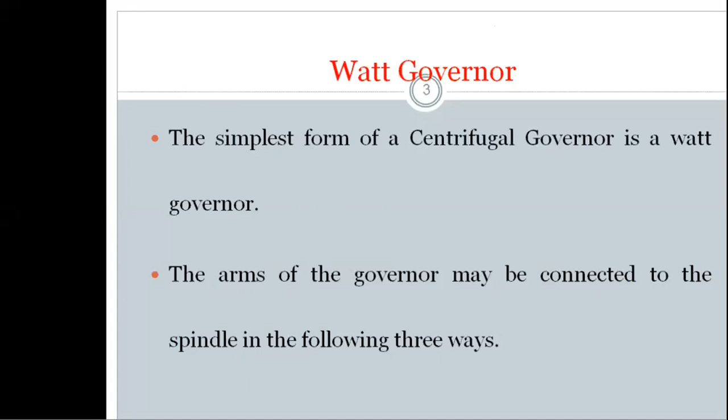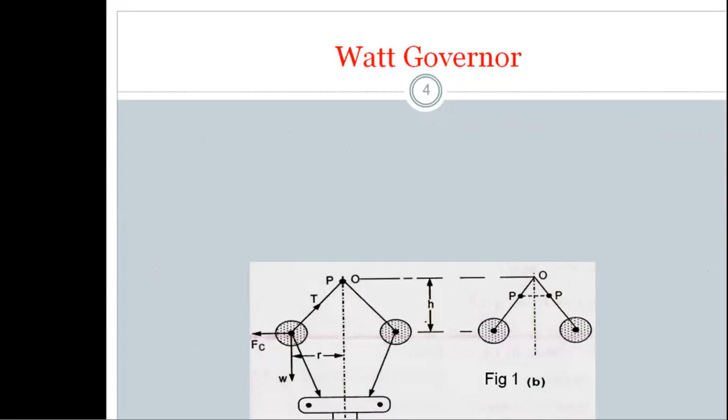Once again I will recall the construction of this Watt governor. Here is the sleeve which slides along the spindle. This is the spindle axis, and these are the links - one link and another link. These are the two arms, and in this figure the two arms are pivoted on the axis of the spindle. So this is one, and next the pivot may be on the spindle axis as shown in figure A.

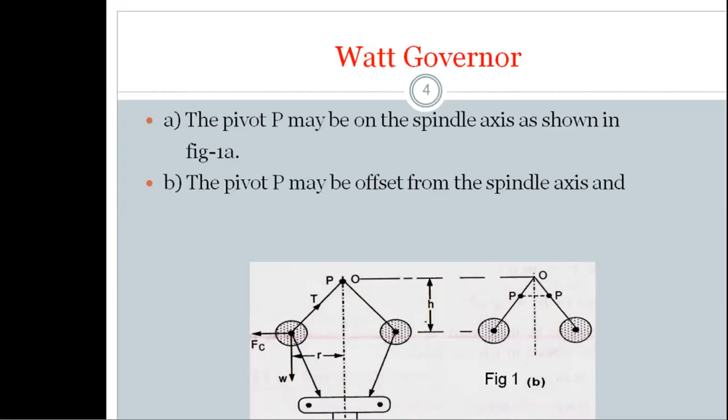Sometimes the pivot may be offset from the spindle axis. This is the spindle axis and the pivot is away from it, here and here, away from the spindle axis. And the arms when produced intersect at O as shown in the figure. So if you see, this is the arm, this is the pivot, and this is the arm. If you produce them onto the axis, they will intersect at one point, that is O.

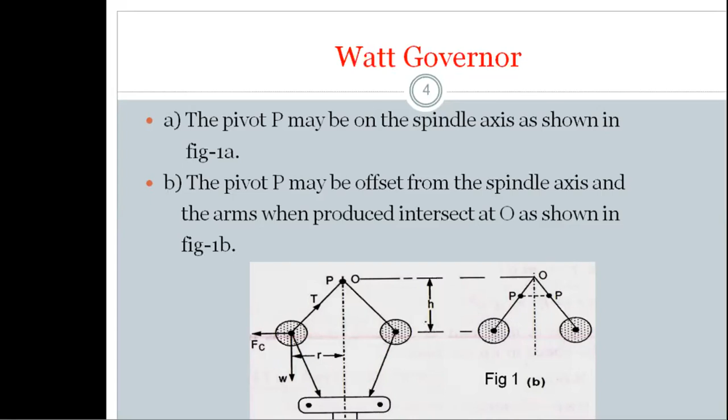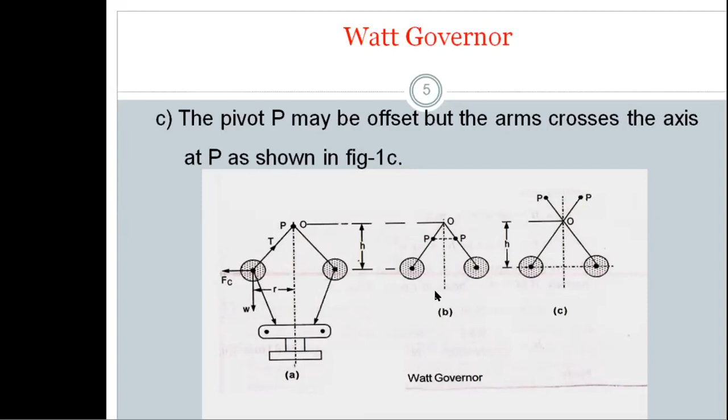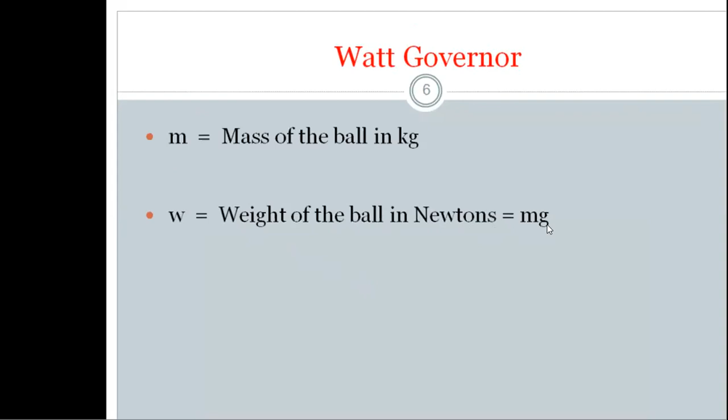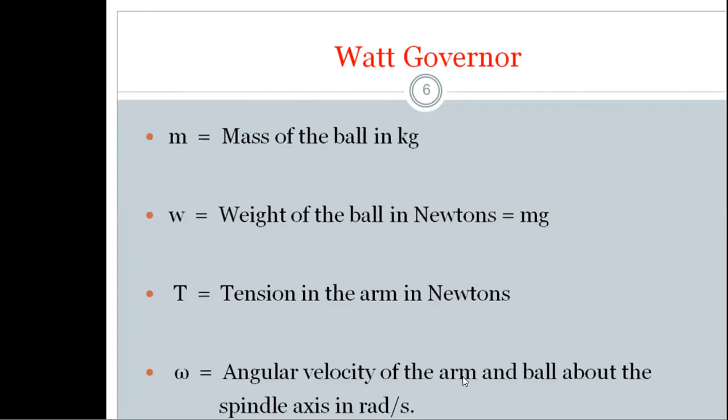For the Watt governor, let m be the mass of the ball in kgs, and W the weight of the ball in newtons, that is mg, where m is the mass of the ball in kgs and g is the acceleration due to gravity. T is the tension in the arm in newtons, and omega is the angular velocity of the arm and ball about the spindle axis in radians per second.

R will be the radius of rotation of the ball, and Fc is the centrifugal force acting on the ball in newtons, equal to m omega square r. As per Newton's second law, force equals mass into acceleration. Similarly, centrifugal force acting on the balls equals mass into angular acceleration, that is m omega square r, where m is the mass of the ball, omega is the angular velocity, and r is the radius of rotation of the balls.

In this figure you can see various points: from this point to the pivot is the vertical height of the arm, whereas the length of the arm is different - so this is the height of the governor. This is the pivot, this is the tension in the arm, here is the radius of rotation of the ball, W is the weight of the ball, and Fc is the centrifugal force acting away from the axis of the spindle. Corresponding to this, there should also be some controlling force.

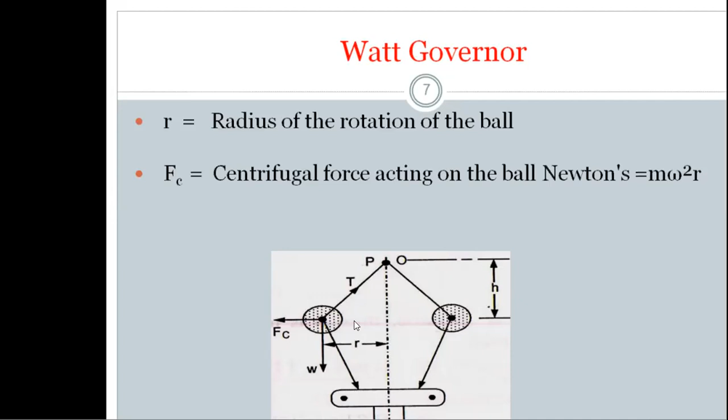So h will be the height of the governor in meters. The terms: m is the mass of the ball in kgs, omega is the angular velocity in radians per second of the spindle along with the balls and arms, r is the radius of rotation, Fc is the centrifugal force acting on the ball in newtons, and T is the tension in the arm.

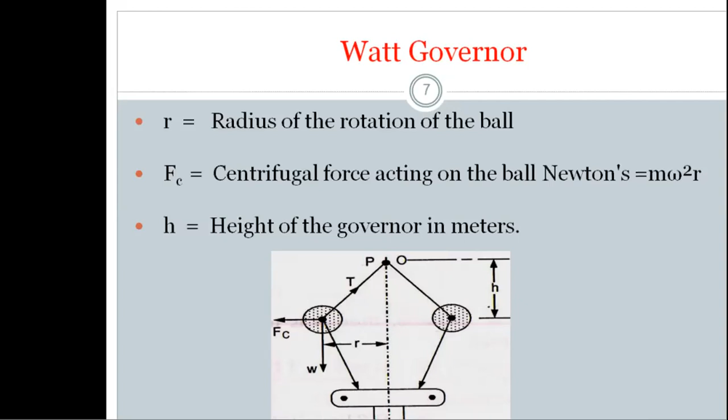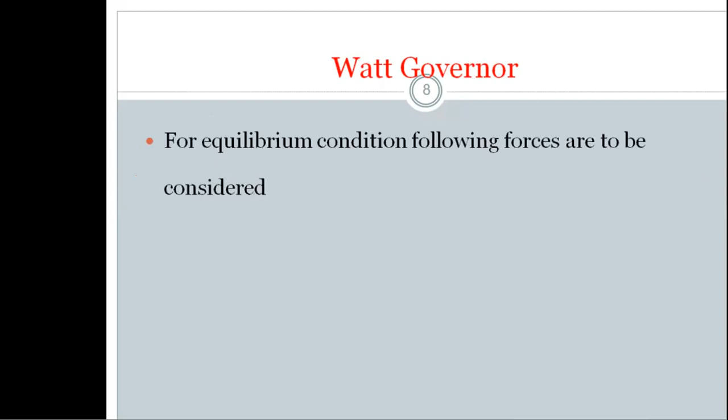So this is all about it. Now for equilibrium condition, the following forces are to be considered.

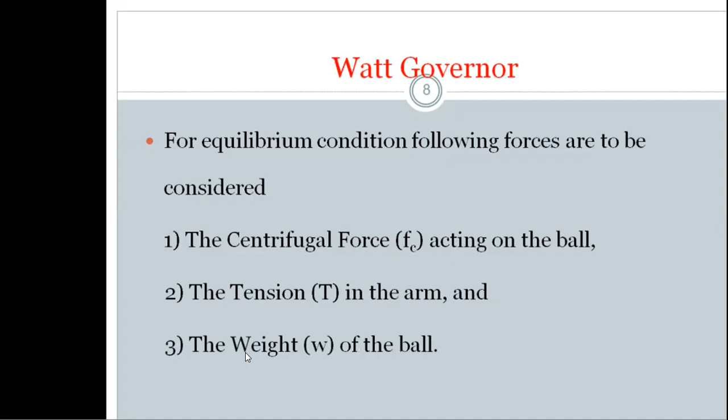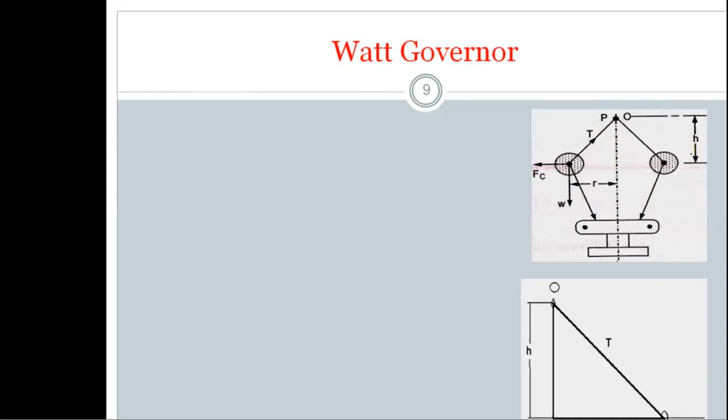Number one is the centrifugal force Fc acting on the ball, away from the axis of the spindle. The tension T is the tension in the arm itself. Next is the weight of the ball acting towards the earth or to the ground. So here you can see the tension in the arm, the centrifugal force, and the weight. Due to these three forces—centrifugal force, tension, and weight of the ball—the spinning ball is kept in equilibrium condition.

Now let us take moments about point O. If we take Fc into height, this gives the clockwise moment, whereas W into radius of rotation gives the anti-clockwise moment.

As per the equilibrium condition, the sum of the clockwise moments must equal the sum of the anti-clockwise moments. The centrifugal force has a clockwise moment, while the weight of the ball has an anti-clockwise moment. The line of action of the tension T passes through O, so the moment for tension is zero.

So only the sum of clockwise moments and anti-clockwise moments matter, both being equal to keep the ball in equilibrium, with no moment contribution from the tension in the arm. W is equal to mg, as we already know.

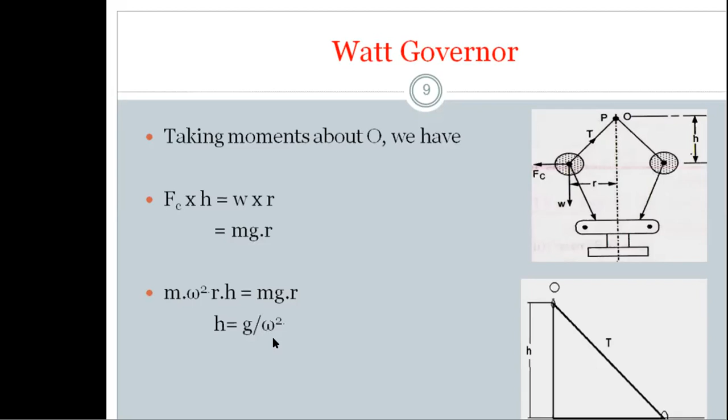Here you can see the tension and R, the radius of rotation. So the height of the governor is given by acceleration due to gravity divided by the angular velocity of the ball squared, where g equals 9.81 meters per second square.

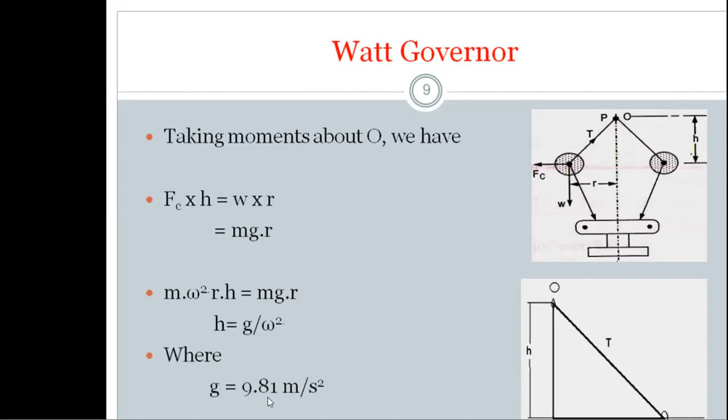So the height of the governor is inversely proportional to the square of the speed. We conclude that in a Watt governor, the height of the governor is inversely proportional to the square of the speed. The speed of the governor is independent of the mass of the ball—the speed does not depend on the mass, but depends on the height of the governor.

If the speed of the governor increases, the height will decrease. If the speed of the governor decreases, the height will increase. So this is the idea—this is all about the analysis of the Watt governor.

Let us see one simple problem on Watt governor. Calculate the height of the Watt governor when it rotates at 60 rpm, that is 60 revolutions per minute. Also find the change in vertical height when its speed increases to 61 revolutions per minute.

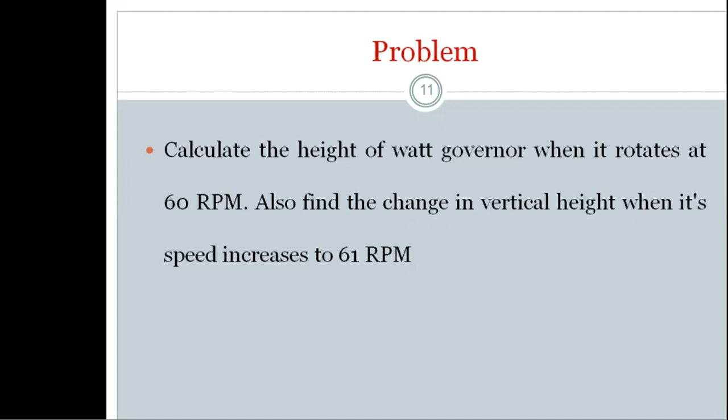As we have the formula, one speed is given in revolutions per minute and another speed is also given in revolutions per minute. By using the angular velocity formula omega equals 2 pi n by 60, we will get our solution. Let us see the solution.

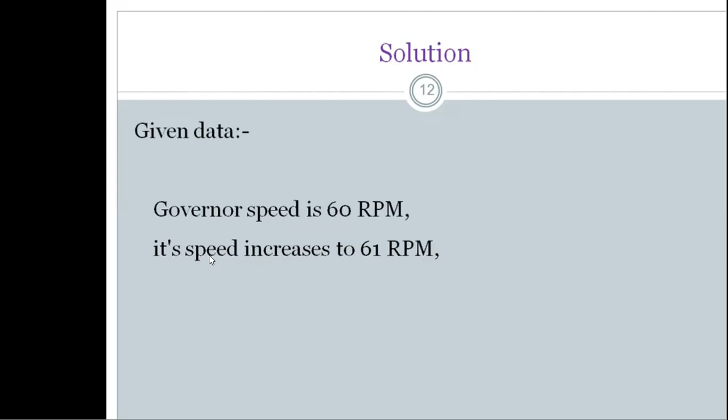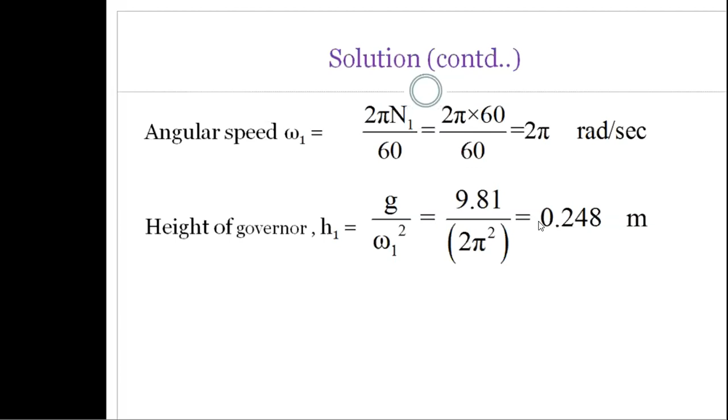Governor speed is 60 revolutions per minute; if its speed increases to 61 revolutions per minute, we need to calculate the change in vertical height. So angular speed omega1 equals 2 pi n1 by 60, which gives 2 pi radians per second. For this speed, the height of the governor h1 equals g by omega1 square, that is 9.81 by (2 pi) square, giving height of the governor as 0.248 meters. This is the first answer.

Similarly, when speed increases to 61 revolutions per minute, n2, the angular speed equals 2 pi n2 by 60, which gives 2.04 pi radians per second. The height of the governor h2 equals g by omega2 square, that is 9.81 divided by (2.04 pi) square, giving 0.24 meters only.

Thereby the change in vertical height of the governor is equal to h1 minus h2. As we are aware, when the speed is less, the height of the governor is more. When the speed is more, the height of the governor is less. Thereby, at 60 speed, the height is more, whereas at 61 revolutions per minute, the height will be less. Thereby, there is a change in the vertical height of Watt governor, that is h1 minus h2 is equal to 0.008 meters, that is 8 mm difference is there.

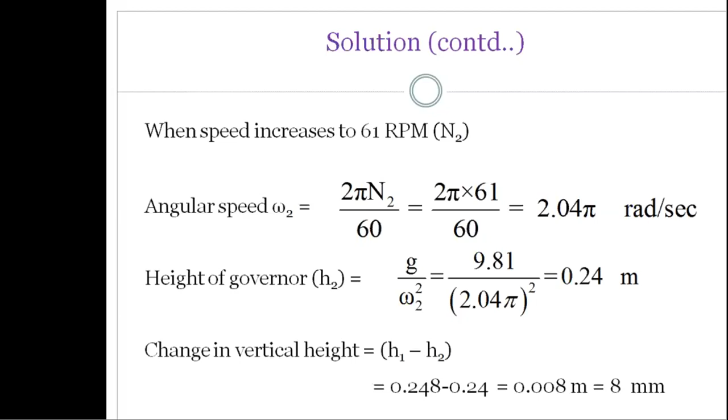With this, we can conclude one thing. Whenever the speed is less, the height of the governor is more. Whenever the speed is more, the height of the governor is less. That means the height of the governor is inversely proportional to the speed of the governor. This is the conclusion for this Watt governor. Let us see once again.

So next, Porter governor. Here you can see the Porter governor. This is also a centrifugal governor. When comparing this previous Watt governor and this Porter governor, the only difference is here there is a dead weight on the spindle. That means over the sleeve there is a dead weight which will bring the governor to the normal position, that means to the rated speed, right?

So here you can see this is the sleeve and this is the spindle, and this is the dead weight. Weight of the dead weight is equal to W. And now in this case, these are the two links, and these two are the arms, which are pivoted at point B, and here is the height of the governor, and R is equal to radius of rotation, and W will be the weight of the ball, whereas Fc is equal to m omega square, that is centrifugal force.

These are the balls. So whereas in the previous case, now the only difference is here in this case is the dead weight. This dead weight will be split at this position and this split position. That means here it is W by 2, here it is W by 2. So that is the only difference. And the same as in the previous Watt governor, spindle is there, arms are there, and links are there, balls are there, and they were pivoted at this position, but only this dead weight is extra in this Porter governor.

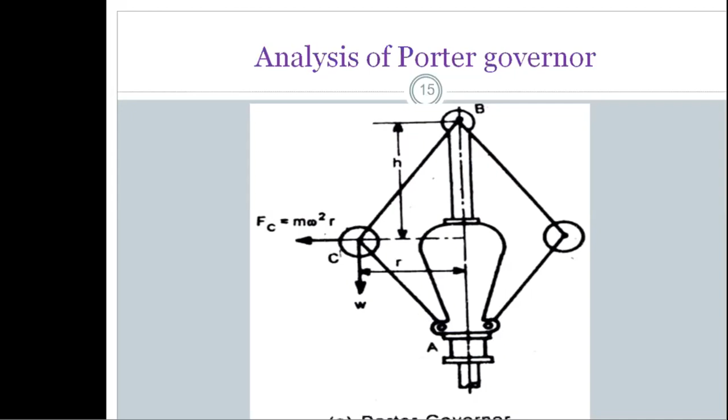Right? So now let us see the analysis of Porter governor. Here are the forces acting on different parts. Here T1 is the tension in the arm, and T2 will be the tension in the link. Whereas in the previous case, there is no tension in the link, but here in this case there is a tension in the link also. And here Fc will be the centrifugal force on the ball, and small w will be the weight of the ball, which is equal to mg, small mg.

And now here it is dead weight W by 2. It is just like a simply supported beam. We can split this W by 2 here on this side and W by 2 on the other side. So capital W is equal to weight of the dead weight, that means mass of the dead weight into acceleration due to gravity. Capital W is equal to capital M into g. And only half of this will be shared.

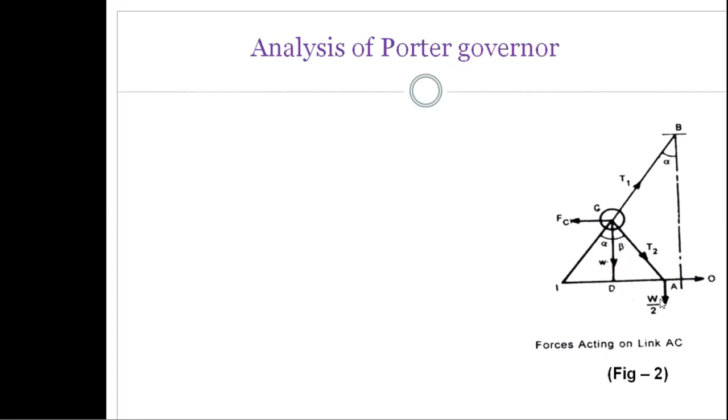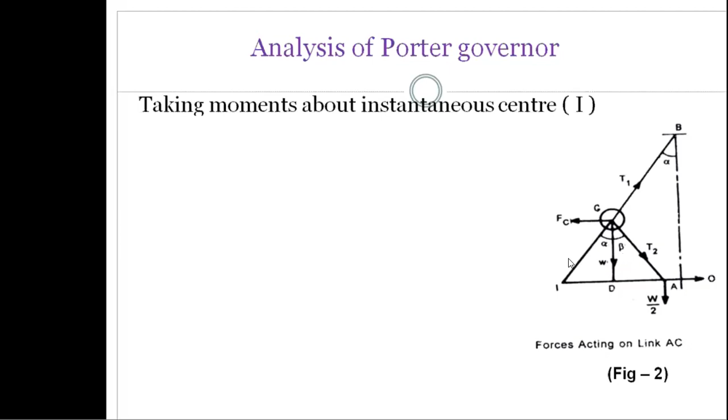So in this analysis, let us take moments about the instantaneous center. Let us extend this one and also extend this one. This will give you the instantaneous center, and we have to take moments about this instantaneous center. If you take moments about this instantaneous center I, the moment for T1 will be 0, whereas there is a moment for T2, and there is a moment for W, and there is a moment for centrifugal force, and also there is a moment for capital W by 2. So let us see. And this is the angle of arm with respect to spindle axis, this will be the angle beta with respect to spindle.

So now after taking this, as we are aware, in order to keep the ball in equilibrium condition, the sum of the clockwise moments must be equal to the sum of the anti-clockwise moments. So thereby in this case, about this point, if you take moments about this point, this will give you anti-clockwise moment, that means centrifugal force will give you anti-clockwise moments, number one. Whereas the weight of the ball will give you clockwise moment, and half of the weight of the dead weight will give you also clockwise moment, whereas T2 will also give you clockwise moment, right?

So that means if you take a triangle forming, this will be the alpha, this will be the beta, so the sum of the clockwise moments must be equal to the sum of the anti-clockwise moments.

FC into the distance CD, that is this distance CD, is equal to this, and this will give you clockwise moment, and this is also going to give you clockwise moments. We are going to neglect this small value, that means tension in the link will be very small.

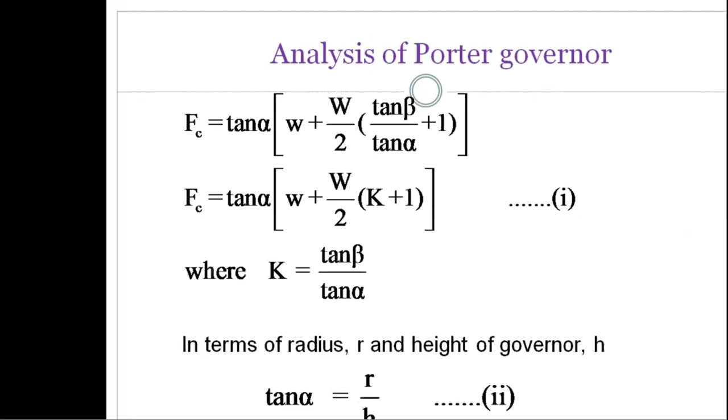If you take K is equal to tan beta by tan alpha, as we are also aware that R is equal to, if you see, so this will be the R, this will be the R, whereas from here to here is the H, so tan alpha is equal to R by h. This is one equation and this is the second equation.

And also centrifugal force Fc is equal to m omega square r. Already we are aware of this formula, so this is the third equation.

From equations 1, 2 and 3, after substitution of the Fc value and the tan alpha value, you will get: m omega square r into small w plus capital W by 2 into k plus 1 into r by h. And now here r gets cancelled, right?

So for further simplification of the equation, we conclude omega square is equal to, r gets cancelled as you have seen, r gets cancelled, and m, if you bring toward this side, or if you substitute m value as w by g,

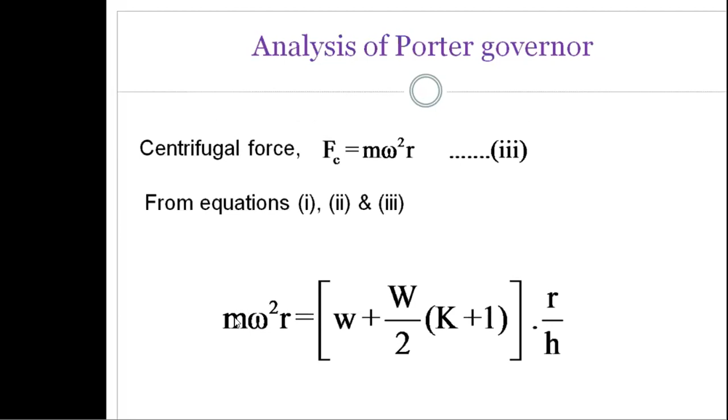then you will get omega square is equal to capital W plus small w plus w by 2, capital W by 2 into k plus 1, by m, into 1 by h, where omega is equal to angular speed of the governor in radians per second, small w is the weight of the ball of the governor in newtons, capital W is weight of the governor sleeve, and m is the mass of the governor balls in kgs.

From the analysis we can see, replacing small w with small mg and capital W with capital Mg, the equation for angular speed becomes omega square is equal to m plus capital M by 2 into k plus 1 by m, g by h.

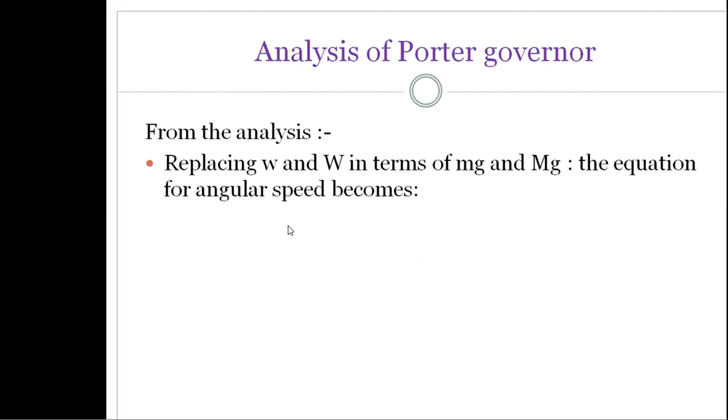So this is the formula in terms of masses, whereas the previous case is in terms of weights, and mass of the ball and speed, whereas this will be in terms of masses.

So when the length of the arms and the suspension are same, then they are at equal distances, r is equal to h, then k is equal to 1. So the formula will become, for r is equal to h and k is equal to 1, then finally omega square is equal to m plus capital M by small m into g by h. That is the final formula that you will get.

So when the lengths of the arms and suspension are same and are at equal distances, in such cases r is equal to h and k is equal to 1. That means if the suspension and length of arms are same, this will happen for offset pivot. That means if the balls are connected to the spindle through arms by means of offset pivot, in such cases this will take place, right?

So this is all about the formulas that we are already having. This is the analysis of the Porter governor. As we are already aware, the working of Porter governor is similar to the working of centrifugal governor, and only the difference is the dead weight over the sleeve. That is the only difference.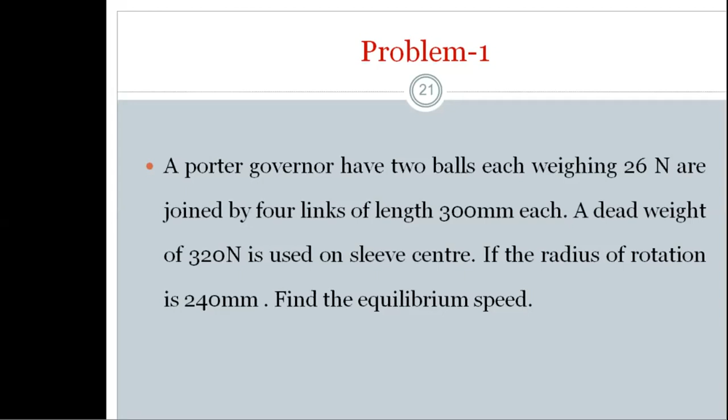So here one thing is, the links are of the same length, number one. Number two is the dead weights are at sleeve center only. So that's why...

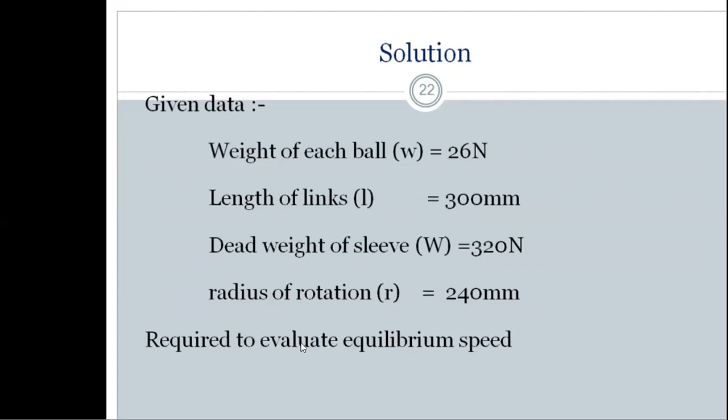Weight of the ball small w is equal to 26 newtons and the length of the links is equal to 300 mm, and dead weight of sleeve capital W is equal to 320 newtons and radius of rotation is 240 mm given, and we are required to evaluate the equilibrium speed. Height of the governor H is equal to L square. That means simply you can see the governor, L square minus R square, length of the link square minus R square, that will give you the height of the governor H, right?

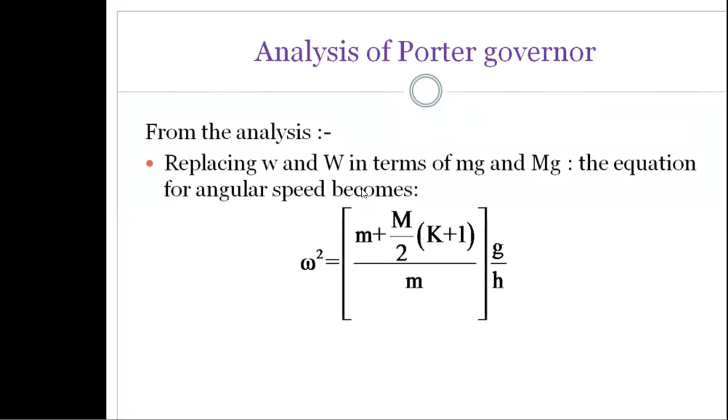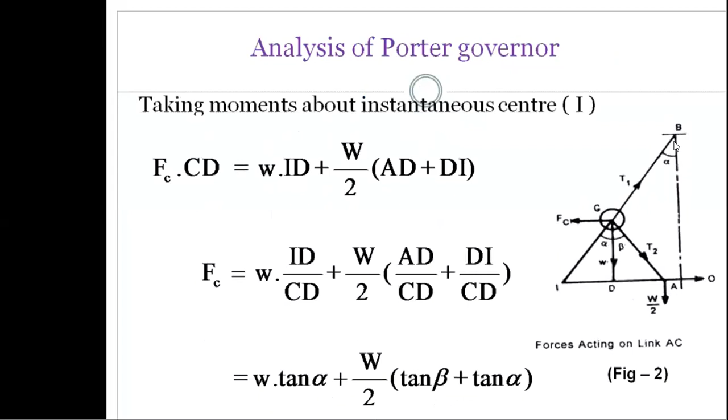This is the R and this is the length. We need H. So L square is equal to R square plus height square, whereas height square is equal to L square minus R square. That you must remember once again.

So that is the idea. Height of the governor H is equal to L square minus R square, whereas L is equal to 300. H square is equal to 300 square minus 240 square, which gives height of the governor equal to 180 mm.

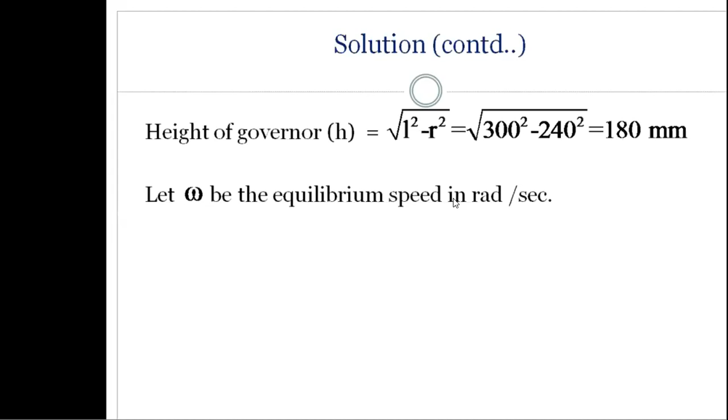And let omega be the equilibrium speed in radians per second. Then omega square is equal to small w plus capital W by 2 k plus 1 by m into 1 by h. So here you can see, as the length of the arms and links are the same, k is equal to 1, number 1.

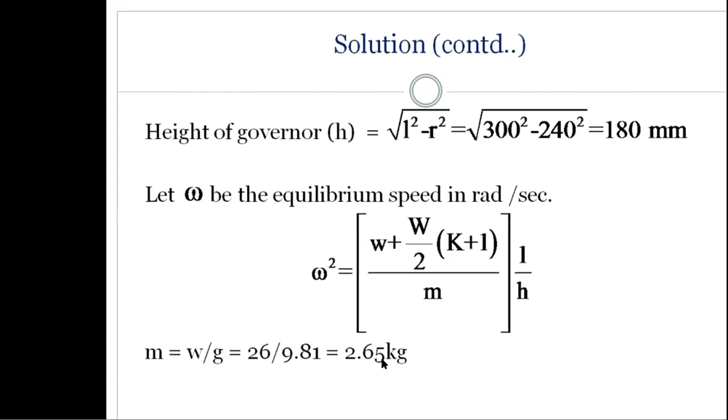So m is equal to w by g, whereas that is equal to 26 by 9.81, that is 2.65 kg. So if you substitute 26 plus 320 by 2, whereas I told you already this length of the links is same, that's why k is equal to tan beta by tan alpha is equal to 1, because alpha and beta are same. That's why tan alpha by tan alpha is also 1, or tan beta by tan beta is also 1. That's why k is equal to 1. So thereby, m is equal to 2.65.

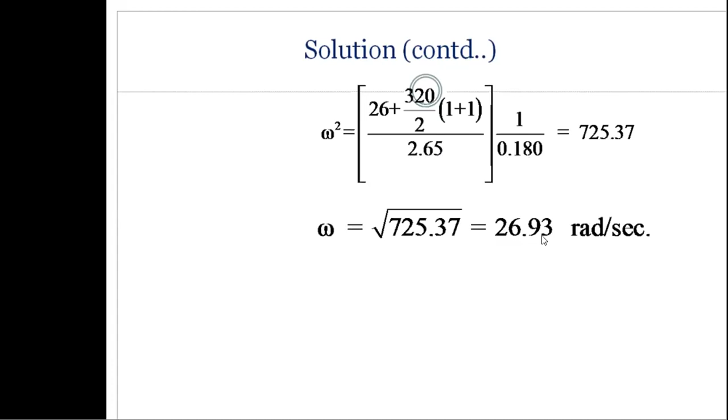After substitution, omega square is equal to 725.37. That is, omega is equal to 26.93 radians per second. So to evaluate speed in revolutions per minute, omega is equal to 2 pi n by 60, or n is equal to 60 into omega by 2 pi. That will give you speed equal to 257.16 revolutions per minute. Like this you can calculate for Porter governor.

257.16 revolutions per minute. Otherwise, in terms of angular speed, 26.93 radians per second. Next, problem 2.

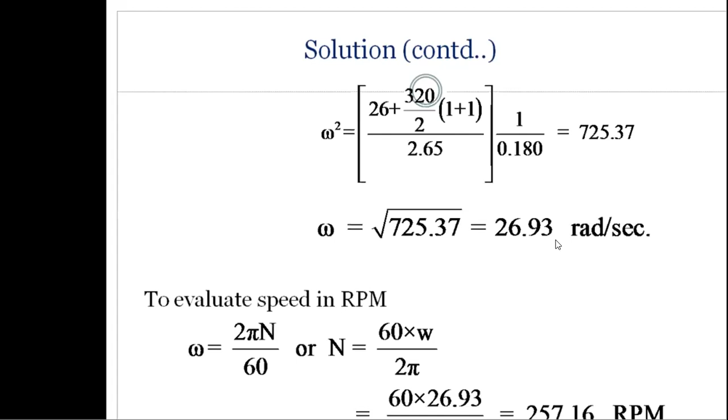A Porter governor has balls of mass 3 kg attached to a central load of mass 20 kg. It has equal arms of each 200 mm long, pivoted on the axis of rotation. The radius of rotation of the ball is 150 mm when the governor begins to lift, and is 180 mm when the governor is at maximum speed.

So complete the maximum speeds and... sorry, this is not complete, this is compute the maximum speeds and the range of speed.

Simple, here equal arms, that's why k is equal to 1, and the dead weight is pivoted on the axis of rotation, thereby r is equal to h. So two conditions are there, radius of rotation is one is 150 and another condition is 180. So it is at maximum speed, simply we can say it may be the minimum speed.

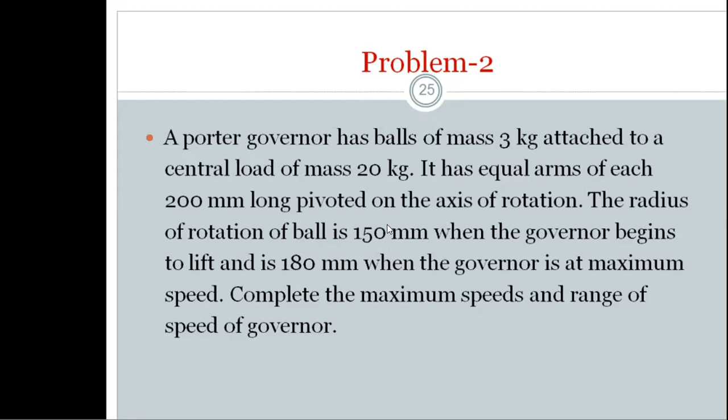So here you have to calculate: length of the arms L is equal to 200 mm. At maximum speed, radius of rotation R1 is equal to 180 mm, and height H1 is equal to square root of L square minus R square, which is 87.17 mm, that is 0.08717 meters.

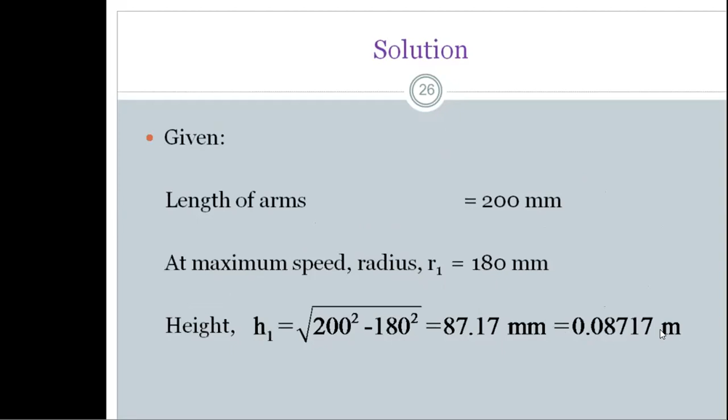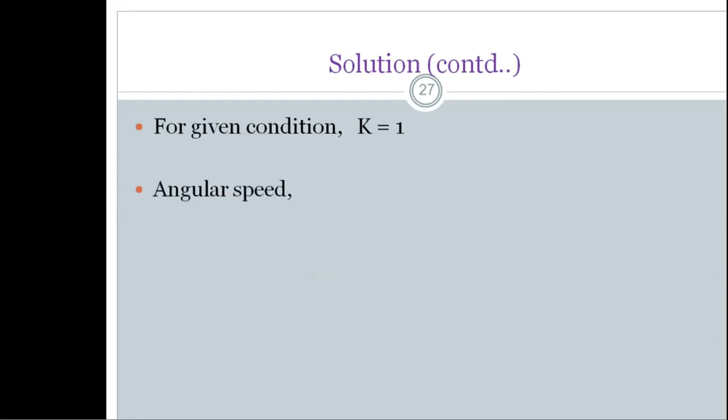And similarly, for the given condition k is equal to 1, because the lengths of the links are same, that's why k is equal to 1, and the angular speed omega 1 is equal to square root of (small m plus capital M) by small m, into g by h1, after substitution. This is the formula we must remember in terms of masses, where k is equal to 1, r is equal to h, and in such case this is the formula we must remember.

m is equal to 3 kg and M is equal to 20 kg. 3 plus 20 by 3, into 9.81 by 0.08717, that gives omega 1 is equal to 27.37 radians per second. In terms of speed in revolutions per minute, if you take n1 is equal to 60 omega by 2 pi, that will give you finally 280.63 revolutions per minute.

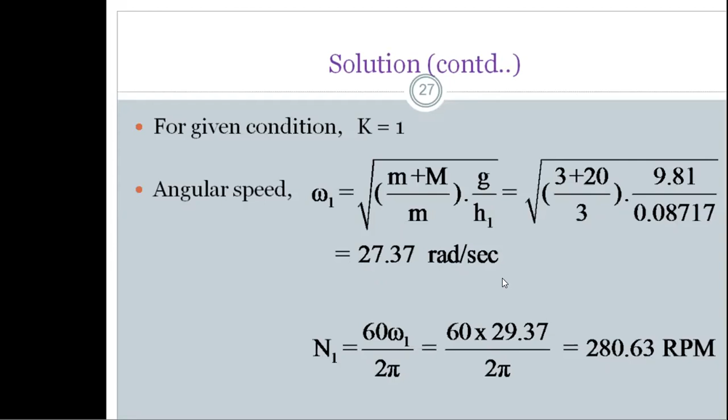So right, this is the maximum speed. Next is when the governor begins to lift. When the governor is at its lowest position, that means minimum speed, radius will be r2, that is 150 mm.

If you substitute, h2 is equal to square root of L square minus 150 square, r square, is equal to 132.3 mm height, thereby 0.132 meters.

In such speed, angular speed omega 2 is equal to (small m plus capital M) by small m, into g by h2. After substitution, 3 plus 20 by 3, into 9.81 by h2, you will get omega 2 is equal to 23.84.

So n2 is equal to, after substitution in omega equal to 2 pi n by 60, you will get n2 is equal to 227.8 revolutions per minute. Whereas the range of speed, that means maximum speed minus minimum speed: n1 is equal to 280.63, whereas n2 is equal to 227.8, that gives the range of speeds as 52.83 revolutions per minute.

This is the idea of the Porter governor whenever it is at lowest position or at highest position, right? This is the formula that you can use to solve this very easily, right?

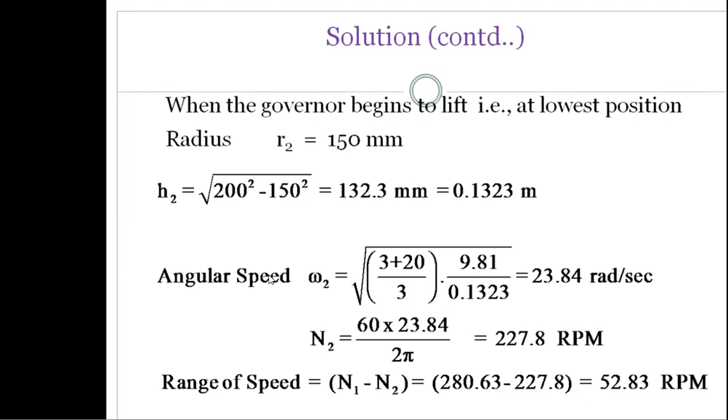So friends, with this we have completed in this lesson the analysis of the Porter governor, and one simple problem we solved, and also the analysis of the Watt governor we completed. Different formulas we have seen, and here also some problems on Porter governor and one problem on Watt governor we have seen.

And now let us see the summary of this lesson, today's lesson. So in this lesson we have discussed the analysis of the Watt governor, which is also similar to the centrifugal governor, and the only difference is there is no dead weight in the Watt governor, right?

The calculation of speed, height, etc. of Watt governor also we have seen. And similarly, in this lesson we have discussed about analysis of Porter governor also, we completed, solved some simple problems on Porter governor and Watt governor also we have seen in this lesson. Let us see the small quiz on this lesson, today's lesson.

So angular speed omega is equal to - I think it is very easy because this formula we have seen in physics itself. That's why omega is equal to simply 2 pi n by 60. This is the answer. Next is, in Watt governor speed of governors is independent of?

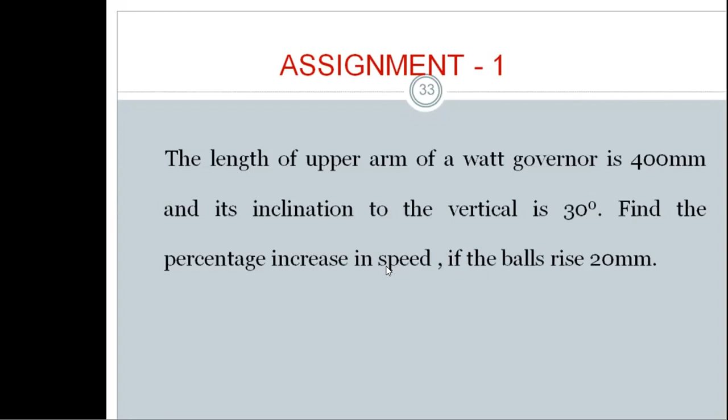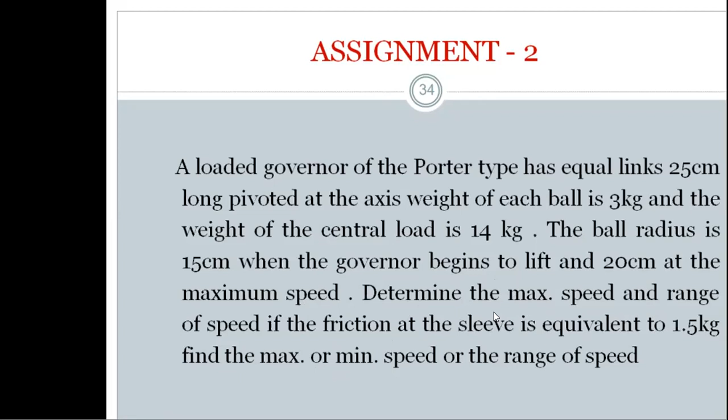Determine the maximum speed and range of speed if the friction at the sleeve is equivalent to 1.5 kg. Find the maximum and minimum speed, or the range of the speed. It is more or less similar to the previous problem - it is a Porter governor problem. You can solve this also very easily.

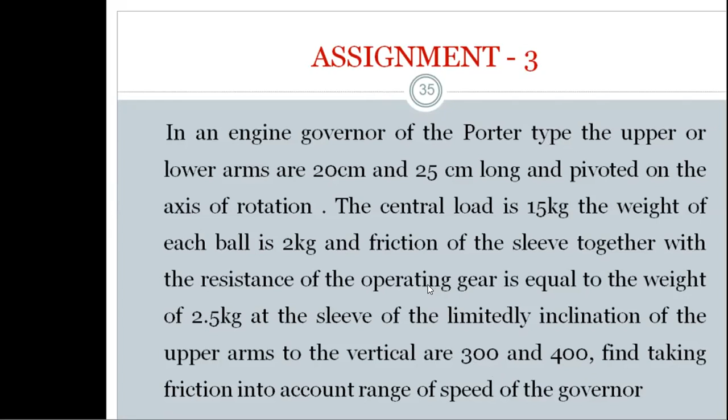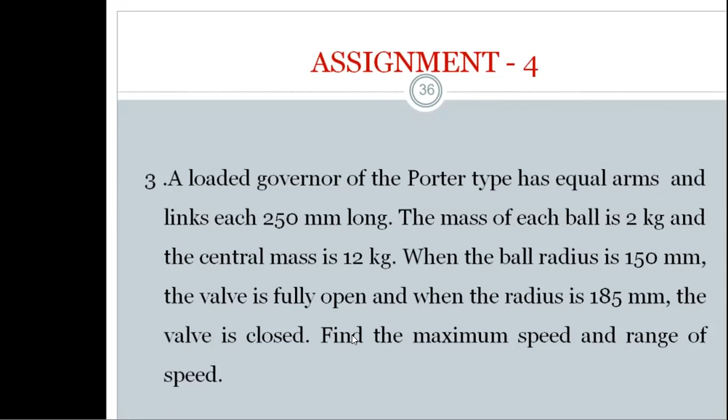So these are the assignments that we are having in this lesson.